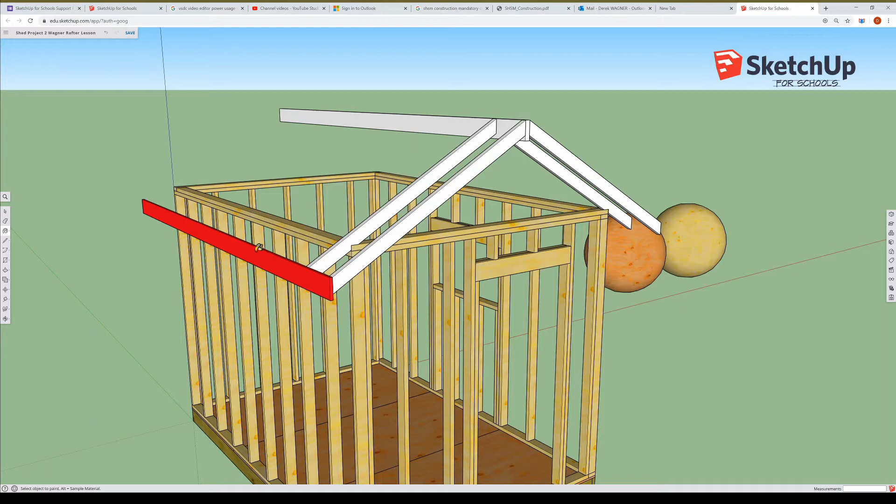The parts that we'll be making today, if we start at the very top of the roof, we have a ridge board. And from there, we have two types of rafter. We have a common rafter, and the common rafter has, down where it meets the top plates, a cut made in it called the bird's mouth cut. And we also have a fascia rafter that doesn't have that cut. That's the only difference between the two of them in our case. We have a fascia board, which we might get to today if we have time. And that is everything that we're doing.

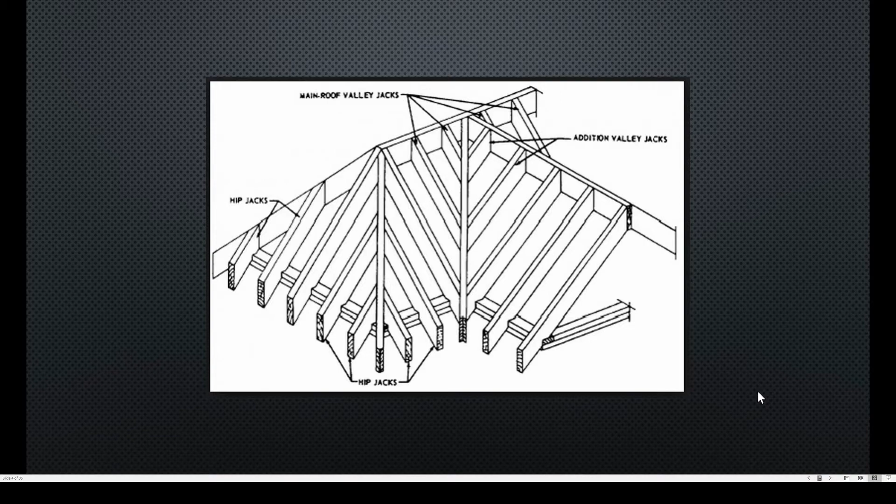You've probably seen lots of different types of roofs in your life, and some of them have very complicated framing with a lot of different angles and a lot of planning to do. We are doing just a simple roof, and we'll have just a common rafter and we'll have a fascia rafter. The other parts that we've learned were the ridge board and the fascia board.

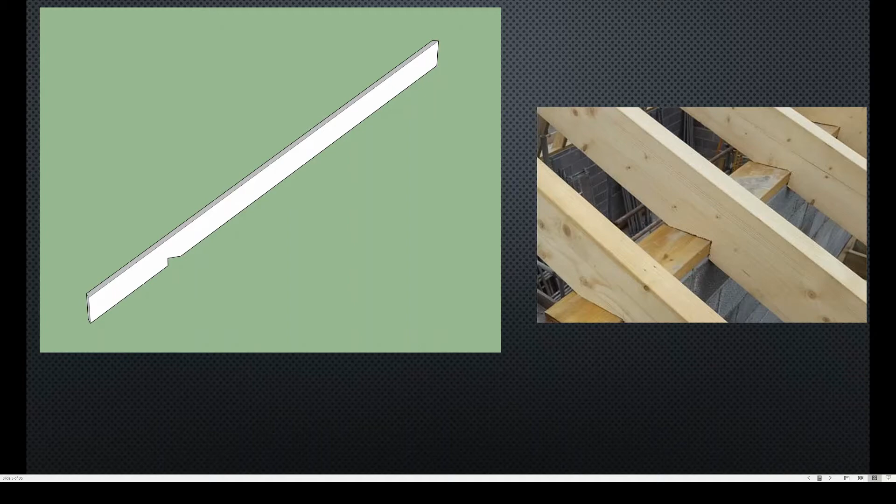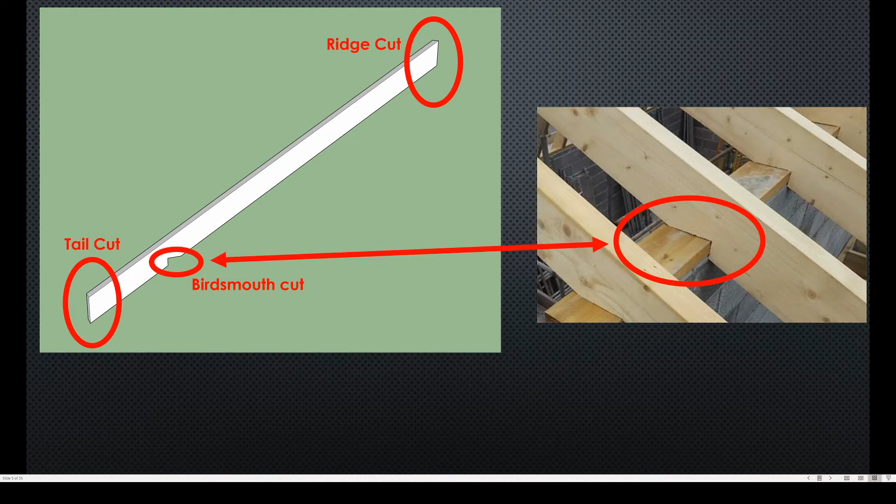Now the cuts on the rafter that I would like you to know for today are the ridge cut at the top, at the bottom there's the tail cut, and there's the bird's mouth cut. And if you weren't able to see the bird's mouth cut very well before, there's a picture of the bird's mouth cut right there. The stuff that I'm going to go through next, you don't have to worry about memorizing all this. Just try and kind of follow along, and it's more of giving you a broad overview of how it would be done in the real world, because we're going to do it in SketchUp and it's very different.

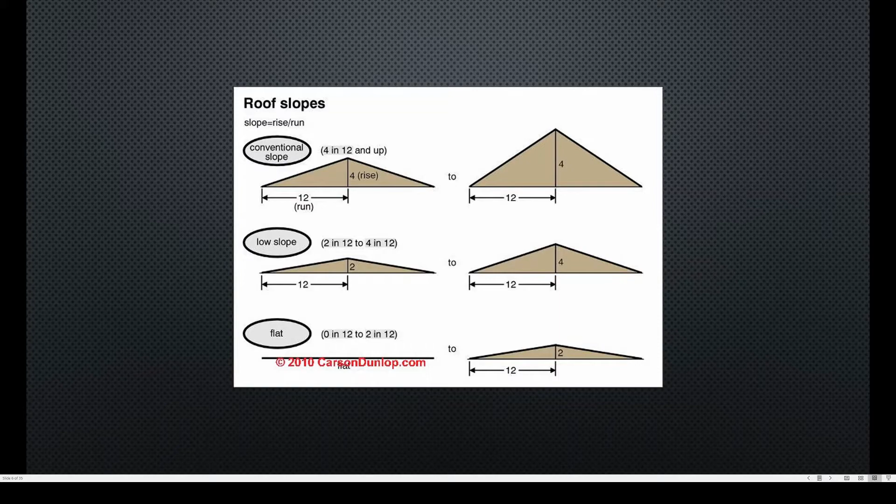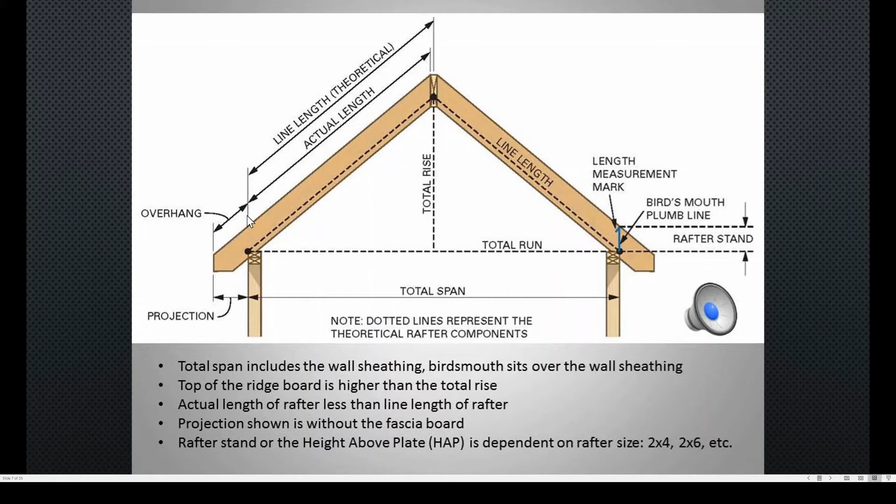There's several ways to plan out how you would build a rafter. So there's mathematical ways where you would actually make yourself a triangle, and you would take half the width of the ridge board and you would subtract that from that triangle, and then you would add how much overhang you want down here, and you would figure it out using math that way.

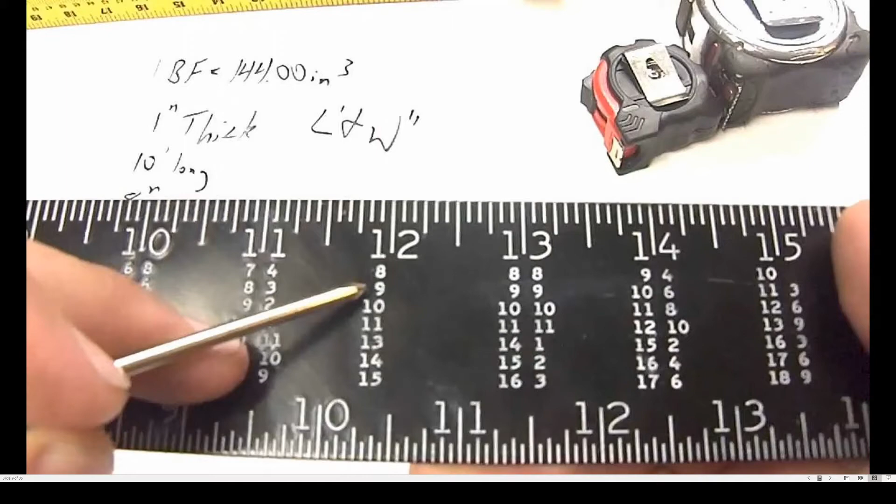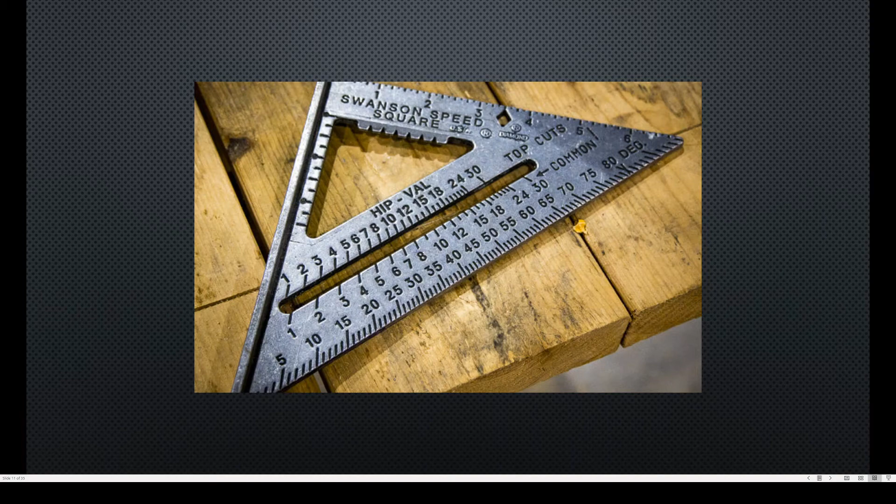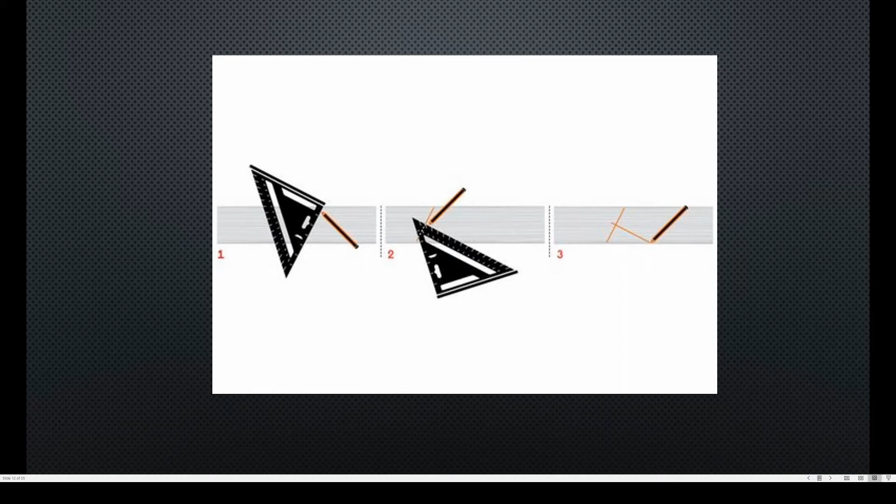There is a method using a framing square. So this is a big steel square like a carpenter might have, and on the edge of that square there's a bunch of tables and numbers that he can learn to use to create his rafters, and he would then take that square and use it to lay out that rafter. It's kind of an old school way. There's speed squares, which have a different set of rules and markings. You can also use that to lay out your rafter, and there's sets of instructions if you were going to do that in the real world.

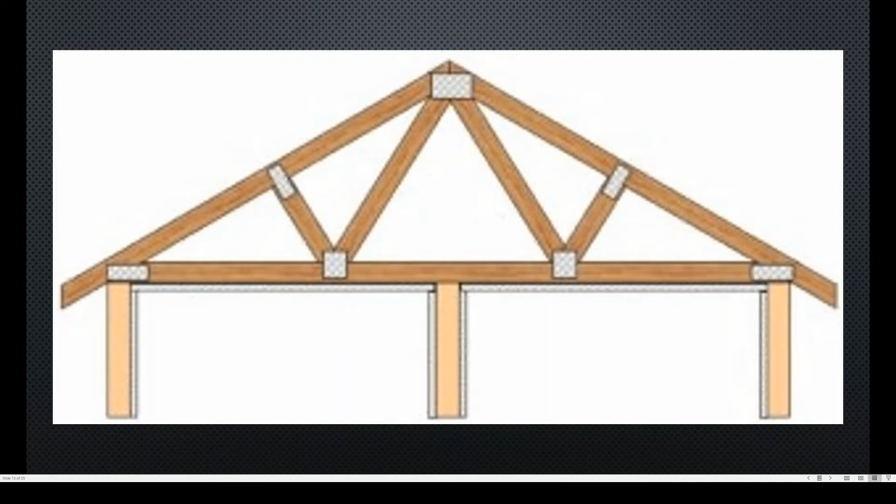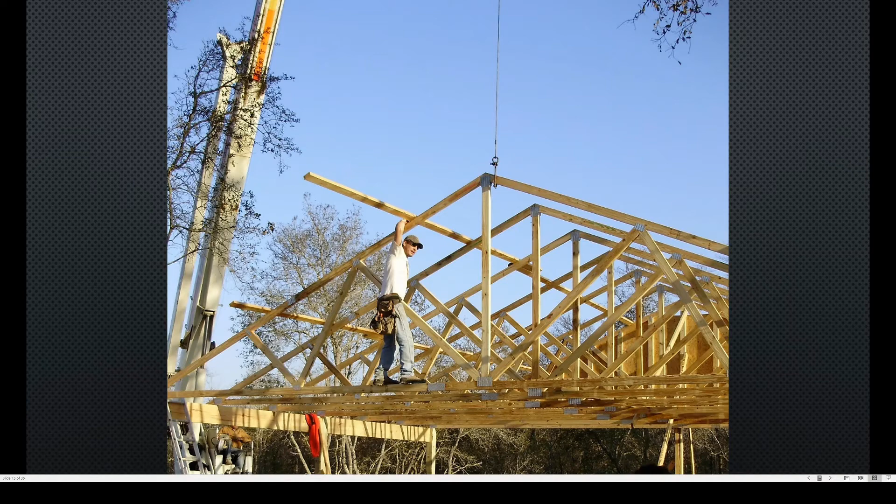One other little bit of trivia here: you might not see rafters on a lot of construction sites because mostly modern house building uses trusses, and this is a truss. This would be made in a factory, and there's several of them in London, and it would be put on a truck and driven out to the job site, and then they would lift them up onto the roof with a bunch of big strong people or with a crane, and they would nail them in place. So it actually ends up being faster and cheaper if you're building a lot of houses to do it this way.

If you're building your own shed, you might do just as well to build your own rafters. So if I was doing this, and I've built a couple of sheds this way, I would probably plan it out in SketchUp. Then I would get my pencils and my rulers and I would lay out a rafter and cut that one rafter, and I would make sure that I'm looking at the shed and checking it as I go along. And then that rafter would be my template, and I would write on it, and it would say template right on it with a pencil.

Then I would trace that rafter and cut out one more, then I would lay them down on the ground and make sure that it all makes sense and that all the cuts, the angles sort of work and that it's going to fit on top of the shed. And then I could finally turn around and cut out all the rafters that I had to do.

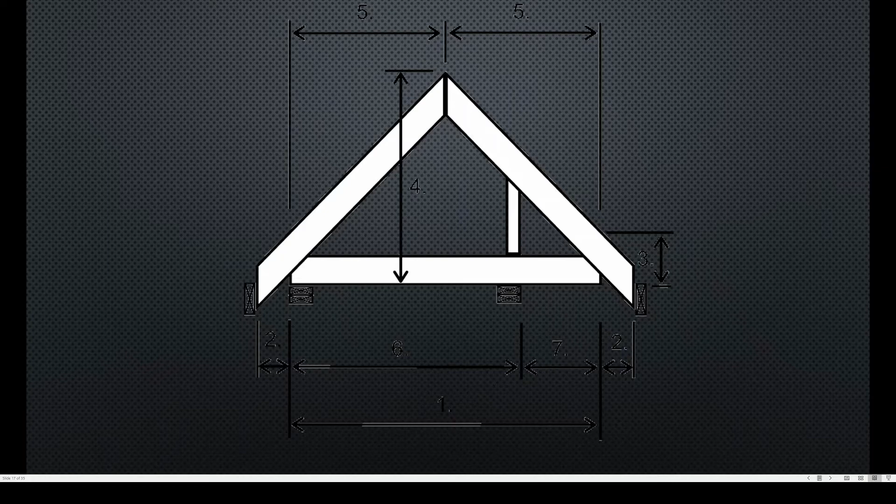Now in what we're doing, we're not going to do any math. We're going to use the features of SketchUp to make life simple and avoid math. It means that we're going to have to do some trickery and some shenanigans in SketchUp, but if you follow along step by step, it's not going to be a big problem for you. So let's go build a rafter in SketchUp.

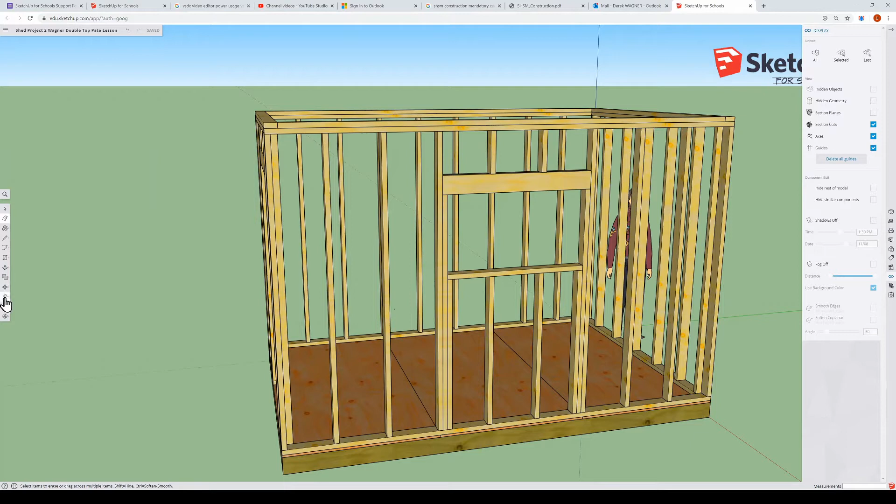So to build the rafter here, we're just going to make it out of a model 2x4 that we make here. So we'll get our rectangle tool and we'll create a model of a 2x4 and we'll just make it really long, and then we'll do what we want with it to help us lay out our rafters. So we're going to get a rectangle started and then 3.5, 1.5, and you'll push pull that out to 10 feet, so 120 inches. And then we'll just cut what we want off of it later.

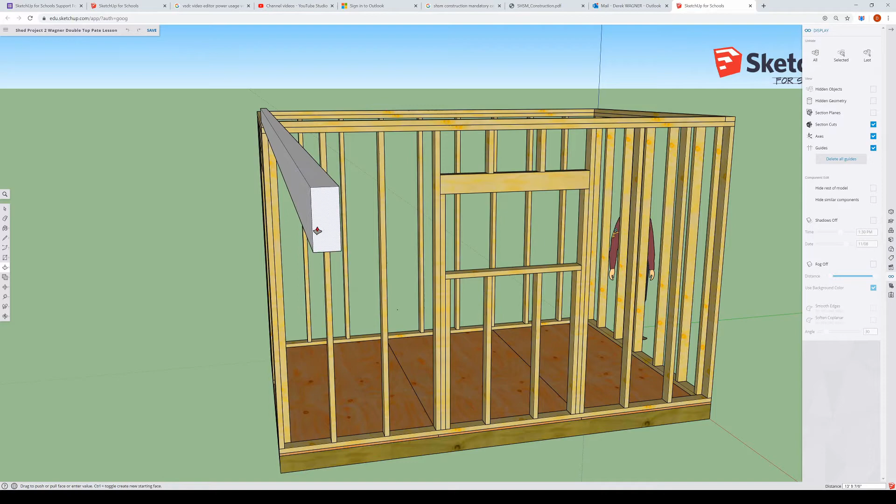And it didn't really grab and push pull there, so I have to try again. Here we come out 120. And we're going to take that, and like I said, we don't make this a component right away. We need to get it rotated into the position that it's going to be. And that has to do with the way components work. If we don't rotate it first, it just doesn't behave right.

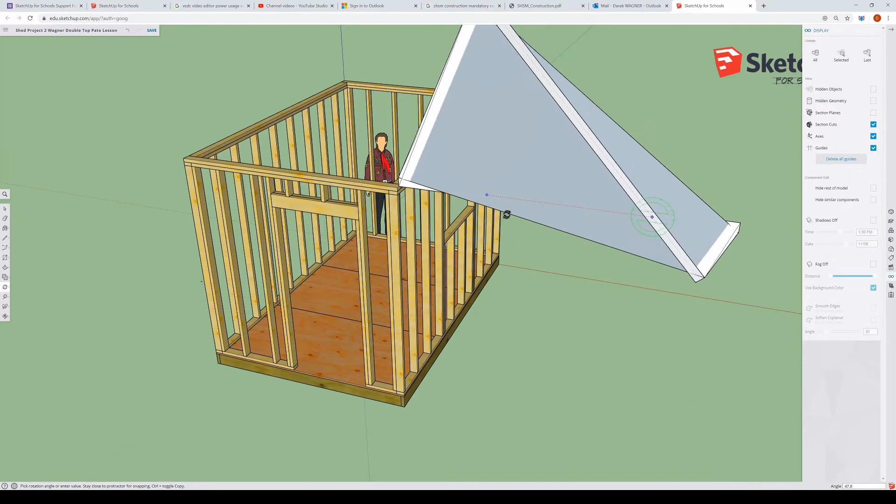The rotate tool, if you just grab it and you put it on a surface, it's going to just rotate that surface. This is why we make things into components, because they're easy to move around and easy to work with, and you don't end up distorting those edges like that. So this is not what you want. And the simple way to avoid that when you're working with something that's not a component and you just want to rotate is to get the select tool and then you click 3 times on it, and that selects all of the surfaces and all of the edges of that thing that we just made.

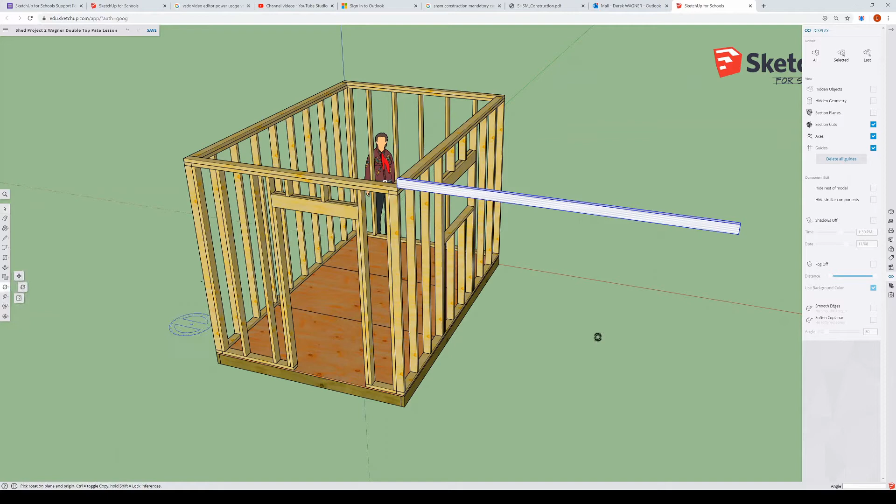So then you would get your rotate tool, and for the rotate tool you go over to the move tool actually, and when you open up the move tool, you'll see 3 choices. You want to select that circular choice with the arrows in it. Now, right now, the rotate tool appears as though it's blue. Okay, so it's going to rotate in the blue axis. If I hold it against this edge here, it's going to rotate in the red axis. If I hold it up against here on this edge, it's going to rotate in the green axis.

And we're going to move this into position later, so it doesn't matter what point we rotate it around. So you can just make sure that your rotate tool is green, and then you can click on it, and you can pull it out and make sure that you're now on the red axis. The rotate tool, you have to click 3 times. You have to click the spot that you're going to rotate it around. You have to put a reference line where you're starting your rotation. So I've just clicked the second time, so that gives me my reference where I'm starting my rotation.

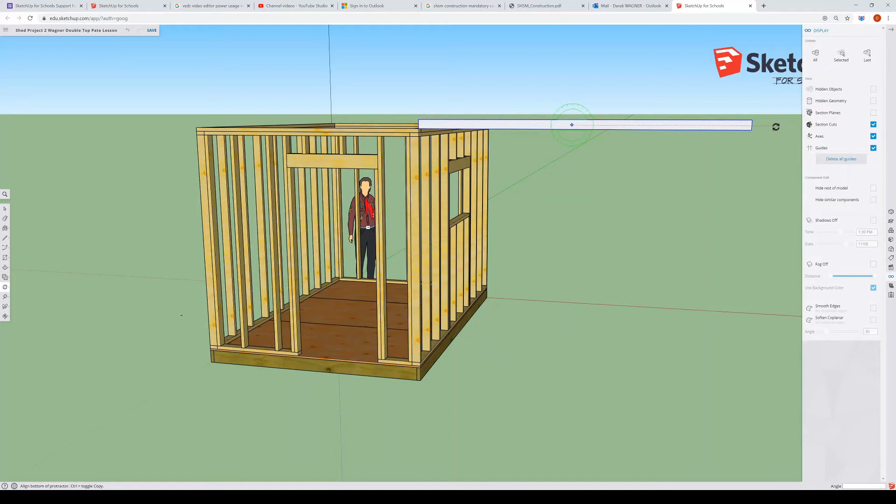And then you can start to rotate up. And the same way that we do dimensions, you can just enter the number of degrees that you want. We're going to rotate this 30 degrees, so you just do 30, enter.

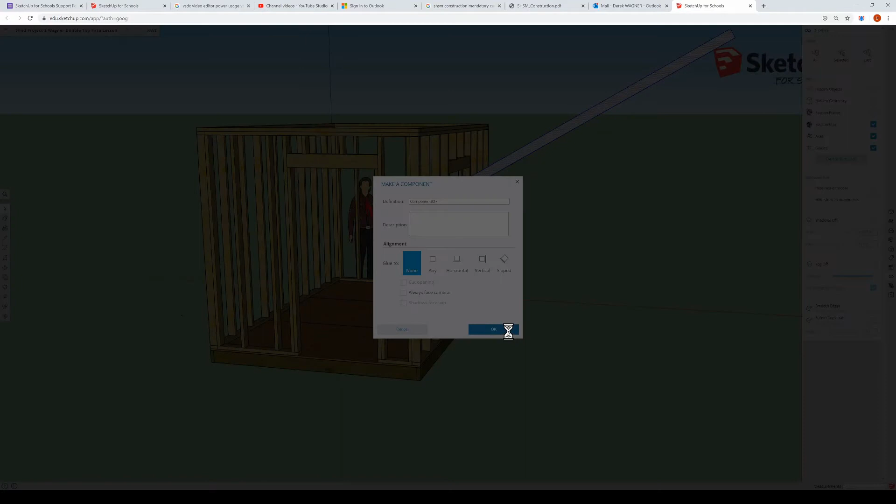And that is our rafter ready to be made into a component. So now you can right click it and you can make it a component. And we're going to move that onto its position. So you have the rotate tool selected right now, so you have to go back to the tool selection, hit that rotate, and you have to reselect the move tool.

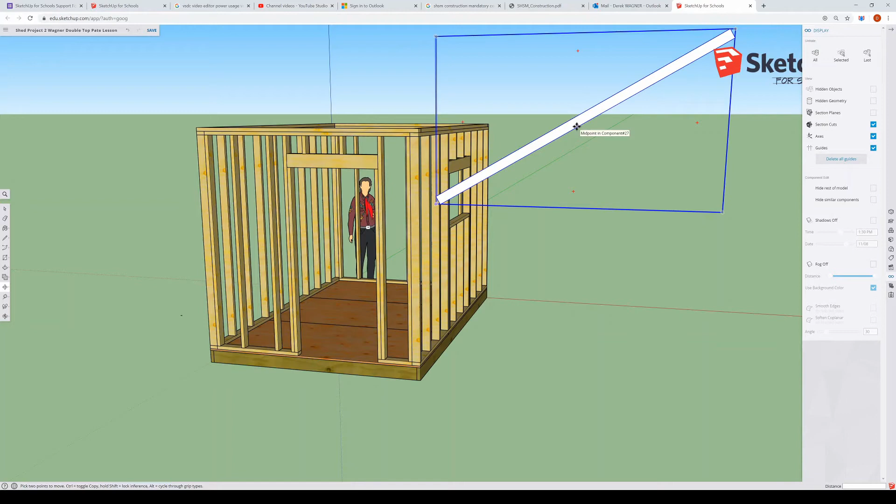And you're going to try to find the exact midpoint of that rafter. So you have to move your pointer along this edge until it says midpoint. Got it, right? Then move that over here to the very tip of the shed. And we're just going to let it sit right there for now. And there we go. So that's right.

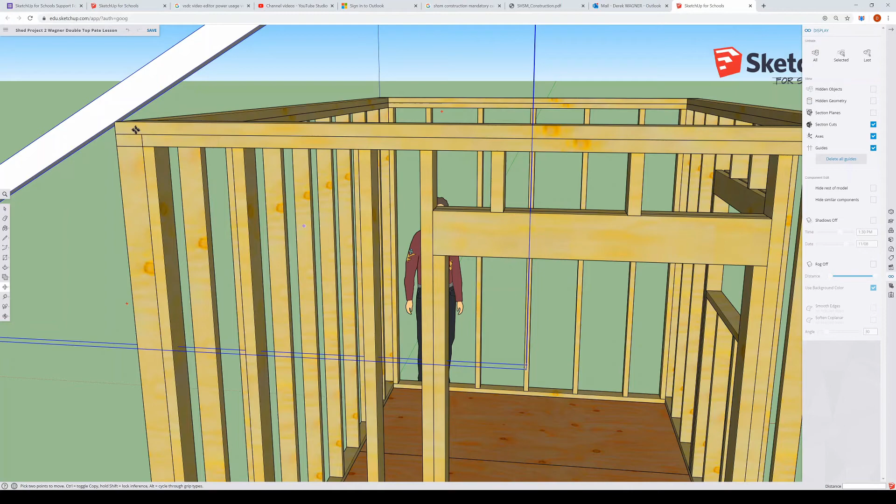And I had a little trouble earlier. This is my second run through of this. I had a little trouble making sure that I had grabbed the correct edge. You need to make sure that this face is flush with the front of this shed, right? So that this corner here is flat with the actual very edge of that rafter. And it looks like I've got that now.

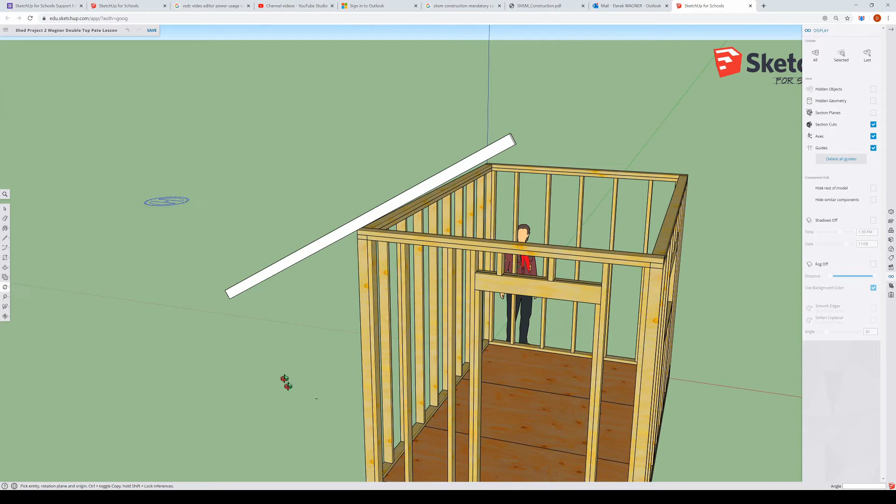So now we need to make a second rafter. And we're going to use the rotate tool again to spin this and make it into a second rafter. So I've had to do a retake here because I did rotate this and then my mouse came off the axis and it didn't work out. So when you rotate this, you're going to be looking down on the top of it so that you can be in the correct axis, because that helps you to position your axis.

And you want your rotate tool to be blue, and I had it there and then it went away. So now my rotate tool is blue. We're going to move this into position, so it doesn't really matter where you rotate it from, right? As long as you're on that component and your tool is blue, you can click once, then drag out along the red axis, and then you click again on the red axis, and then you're going to rotate around.

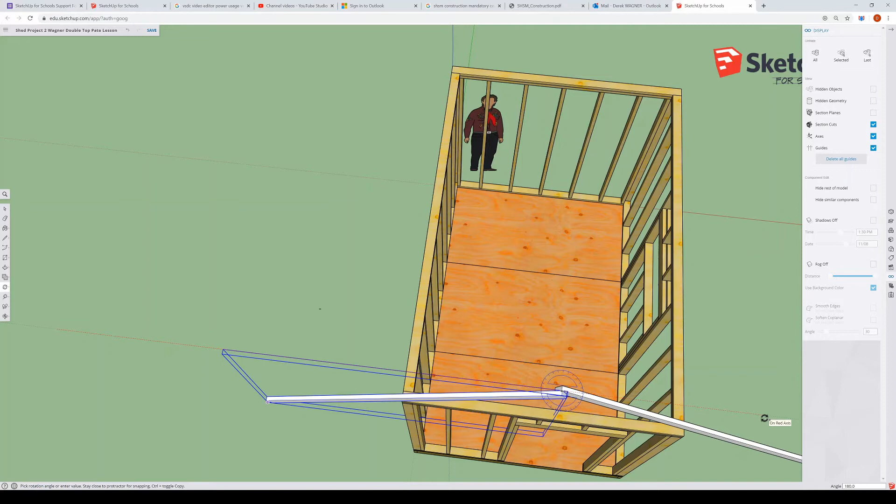And when you get it rotated around, hit control so that you know you're making two of them, so that you're duplicating it. When you get it rotated around, you have to make sure you're on the red axis. That was my mistake last time. So I'm on the red axis. I'm going to be very careful not to move this time, and I'm going to click it.

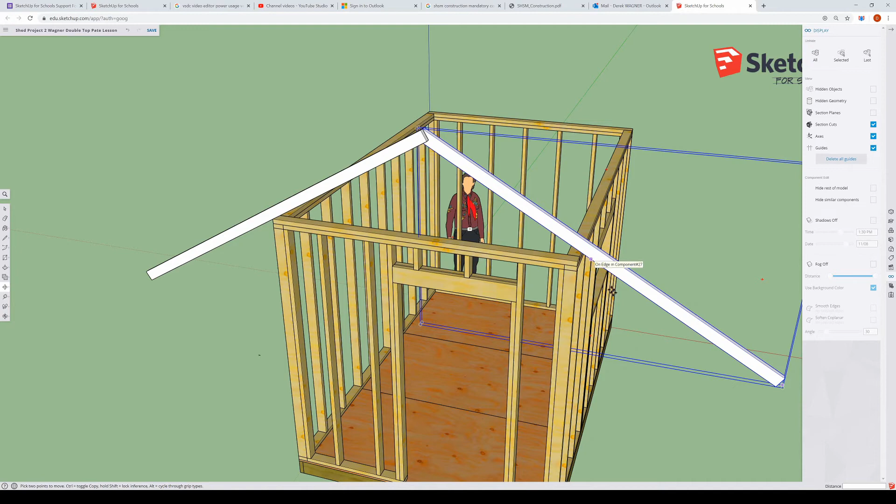Now I have two rafters and they're both facing the way that they need to face, and I just have to get this second rafter into position on the shed. So you have to go over to the rotate tool. You have the rotate tool selected right now. You have to open that up and select the move tool and slide your mouse along until you find the midpoint of that component. Oh, I had it. I'm going to move it onto the exact same spot.

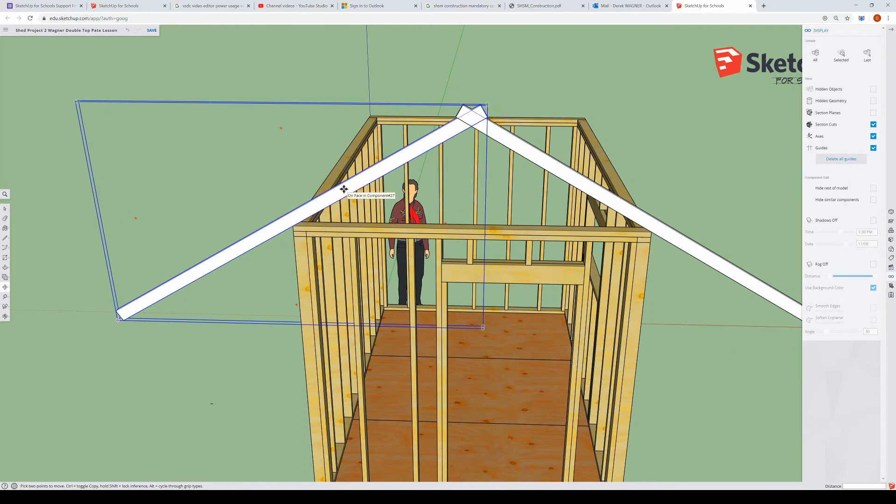And here is where the shenanigans come in, because right now we have these two rafters and they are existing in the same place. I mean, you wouldn't be able to do this in the real world, obviously. Two pieces of wood cannot overlap in the real world, and this would be completely unworkable, but it does work well with SketchUp. So now we just have to use this little bit of geometry at the top here.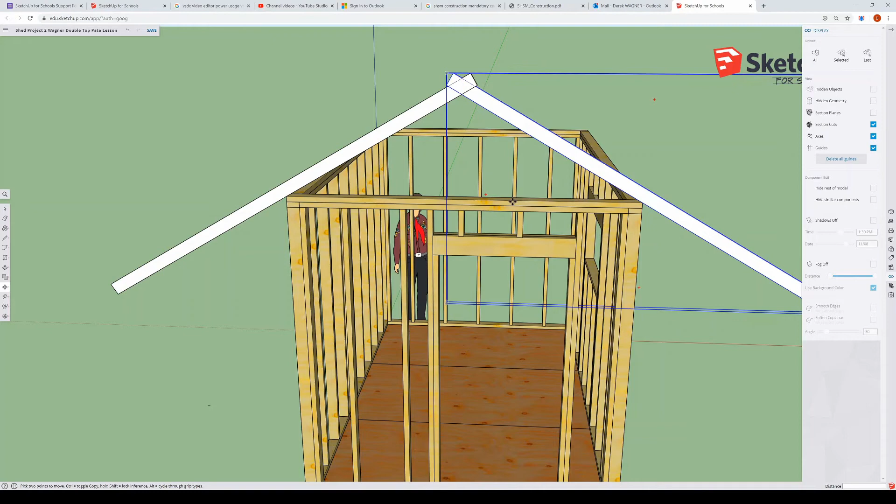This little point right here shows us where the exact middle of the shed is, as long as we've taken our time and rotated everything correctly. You'll notice if you don't get it rotated correctly that all these edges don't line up just perfectly. If you look at it right now, these two boards are actually perfectly aligned in the same place in the way they overlap each other.

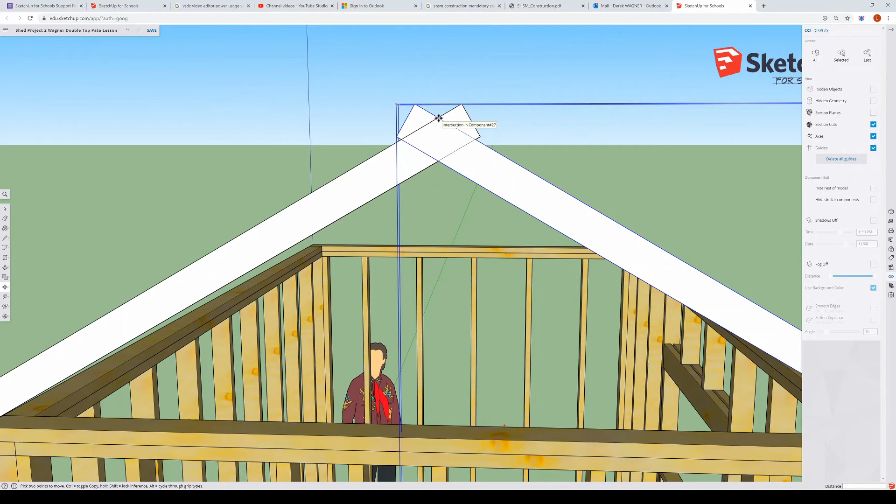So if you can get looking straight down that, we're going to use this point right here to set where we set our ridge board. And our ridge board will be a 2x6, and we'll just get a rectangle and we will draw out a green. It has to be outlined in green, and we want to go 1.5, 5.5, and we've got our rectangle made.

We will pull that out for now just to match, excuse me, where's my push-pull tool here? There we go. We'll pull it out to match the length of the shed, which is 12 feet. So we'll go 1, 2, and the single quotation mark to make a 12-foot ridge board. And that we can make a component out of right away.

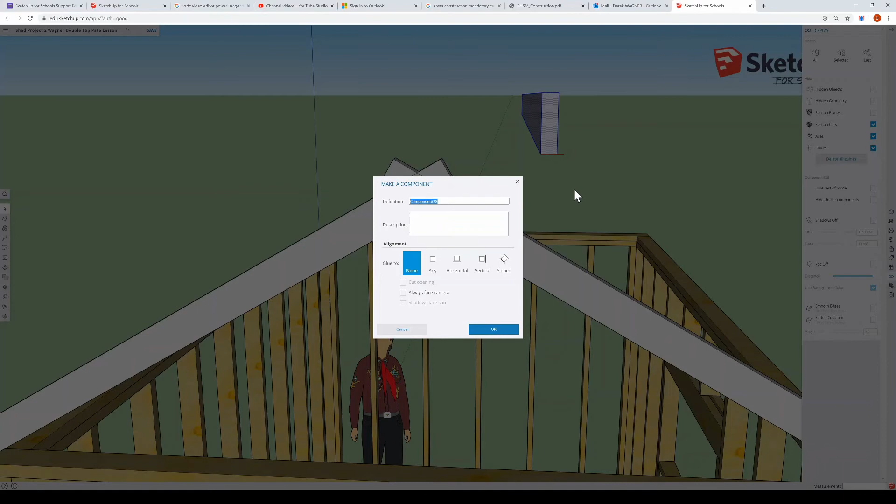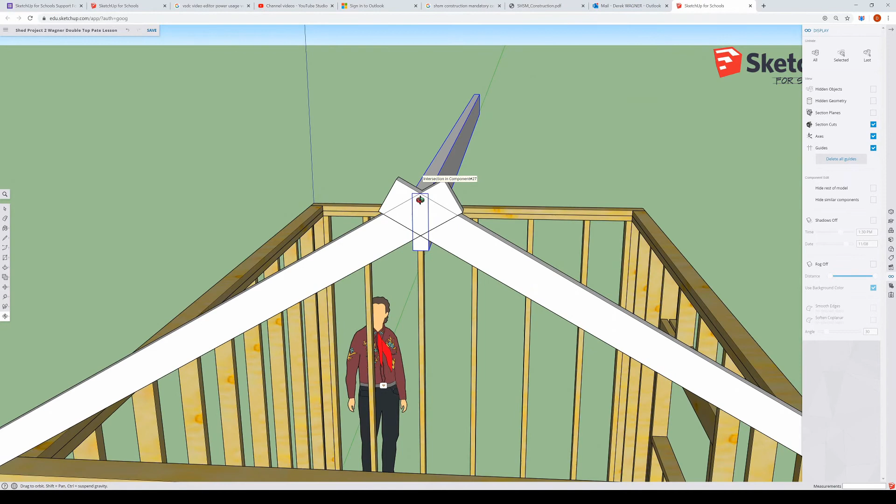And we will make it a component. So here we come with the trickery and the shenanigans again. We are going to take this ridge board and grab it right by the midpoint of the top, and we're going to move that midpoint of the top of the ridge board right onto that X right there, where we can see that now we actually have such shenanigans that we have three pieces of wood occupying the same place at the same time.

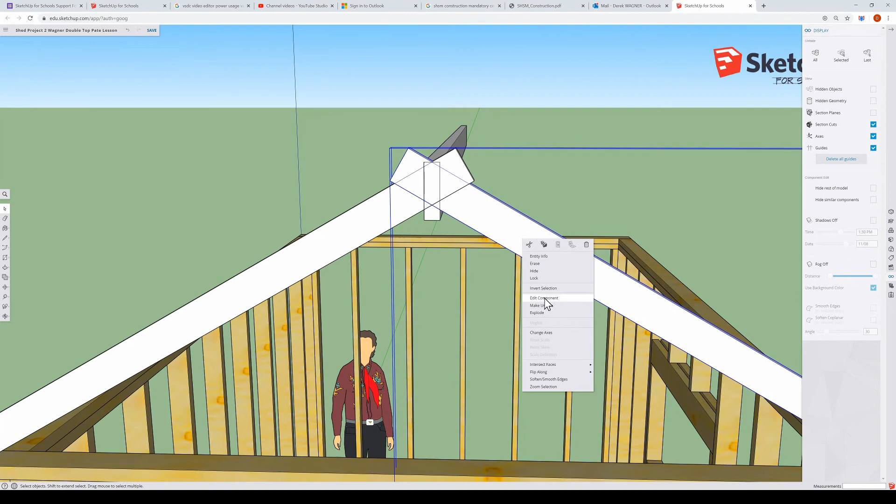And now we're going to sort of use that ridge board to set up our ridge cut on our rafters. So now that we've got it positioned, the simplest thing to do is to hide this one rafter over here. So I'll get my select tool and select that, and then we will hide it. So our next steps are to make our tail cut and our ridge cut. We're going to have to edit this component, and we're going to use this geometry here to set ourselves up. When we edit the component, to save ourselves a step, we'll do both cuts at once.

And if you get the tape measure tool and you come down to this edge right here on the shed and you pull yourself a construction line, get yourself on the red axis, and we're going to measure out 10 inches. So you just enter a 10, and if you've done everything right, then that construction line will be right on the edge of that rafter.

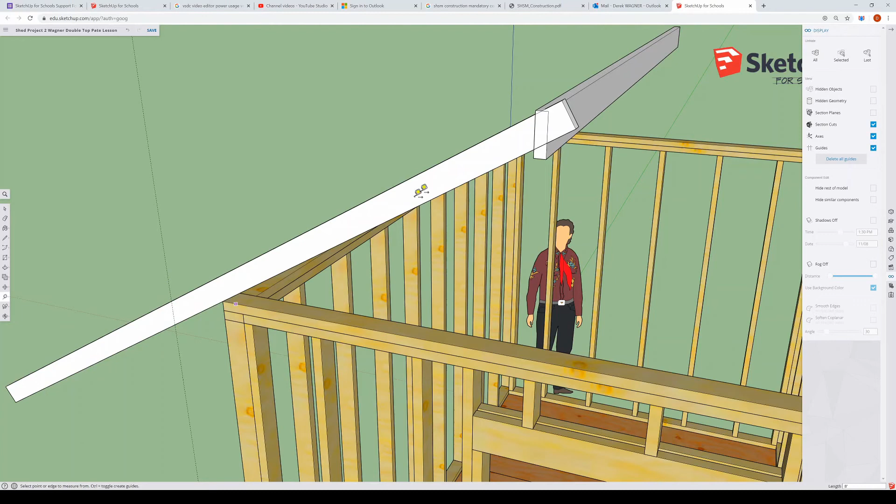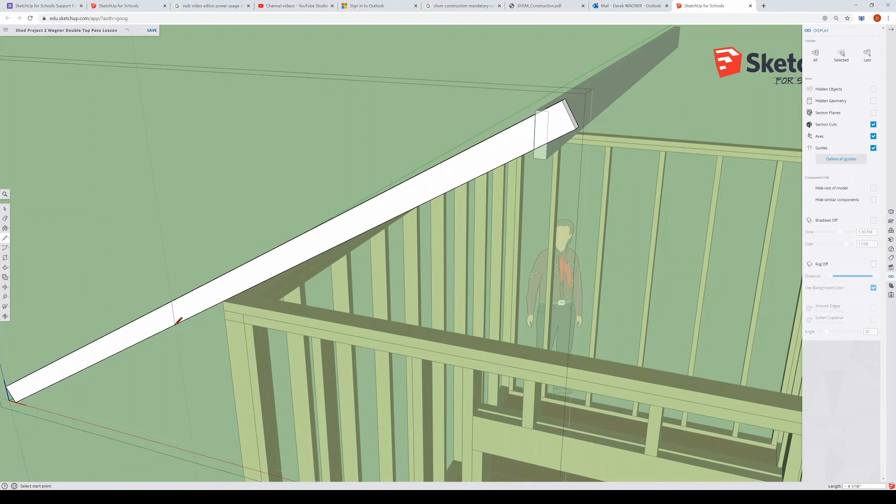So now we have a component editing to do. So we're going to open up the component to edit, and we just have to draw 2 lines with the pencil tool. So we get the line tool, which is a pencil, and you have to get exactly onto that intersection between the ridge board and the rafter and click on it, and you'll draw yourself a line down to the other intersection and click on it. And then quite often the line tool wants to just keep drawing lines. It doesn't seem to be doing it this time, but I always go over and I click the line tool again so that I'm starting a new line. And I have to get onto that intersection and that intersection, and that gives me my lines for my cuts.

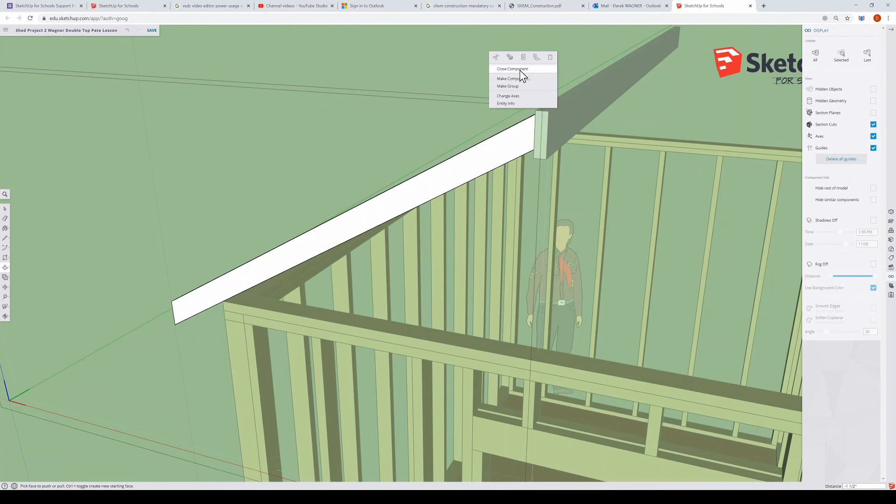So now I go to push pull, I get that section right there, I pull it back, and there we go, that's that cut done. I get this section right here, pull it back, that's that section done, and I can close my component. And I can unhide my other one just to look and see that I've got it right. Unhide all, and I do. If I want, I can move them just to see if they look good on the ends, and I can move it aside and it looks good. Just hit escape. This one, everything seems to be aligned correctly. Just hit escape. So that is our 2 rafters done.

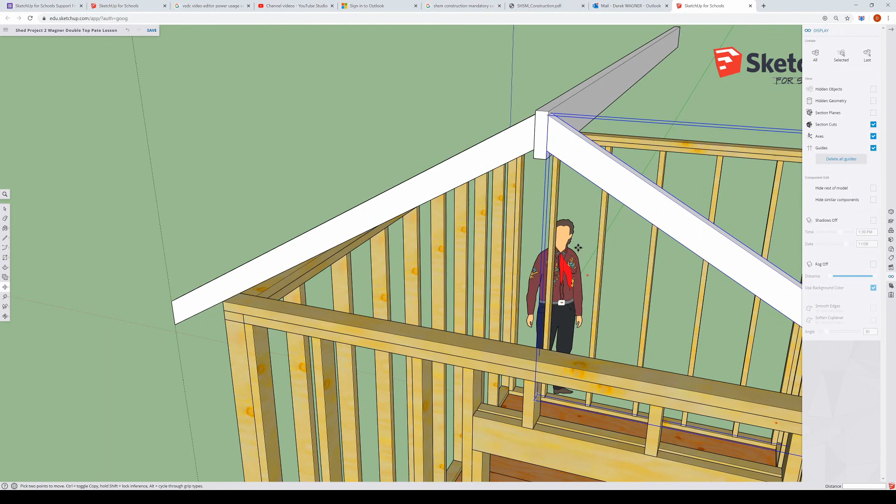The other thing that you would have when you were doing this in the real world is the ridge board would not be sticking up above the rafters like this ridge board is. So you would move it down just to be level with the top of the rafters. And we'll just get our move tool, and we'll get that very corner of the ridge board, and we'll get it moving on the blue axis and hold down the shift key, and then we'll move it down till it's flush with that corner right there. And that's the 2 fascia rafters done and the ridge board.

And this has turned into a 17-minute video, and it's probably the toughest thing to keep organized. There's a lot of little fussy things here. I'm going to just call it quits right here, guys, and we will continue on with the bird's mouth cuts next time out. Anyway, let me know if you're having any troubles, because all these rotations have to be done correctly or things don't end up aligning. All these rotations and movements, undo might be your friend occasionally. So you can use the escape button, use Control Z, use the undo button down at the bottom of the screen down here, and you should be able to work your way through this on your own, I'm hoping.